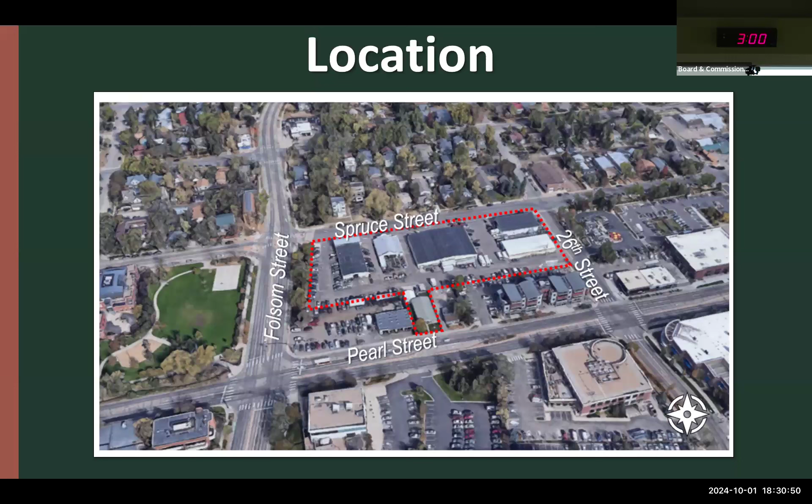So in terms of location, the site is located in central Boulder on Spruce Street between Folsom and 26th Streets, and includes a small adjoining lot on Pearl Street. The 2.33 acre site, or about 101,000 square feet and change, currently contains 5 one- and two-story light industrial, commercial, and retail buildings. It also contains a single-story, single-family residence with a detached garage at 2537 Pearl Street. This is just a shot of the existing buildings on the site.

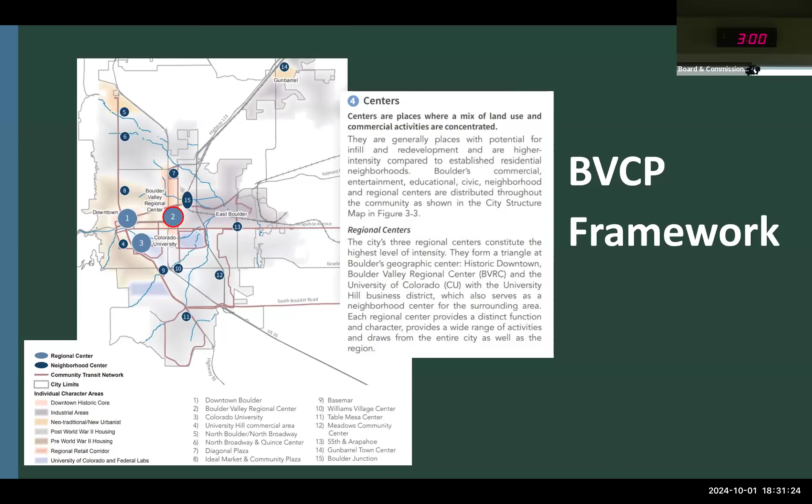For planning context, in terms of the comprehensive plan, the site is part of the Boulder Valley Regional Center, which is considered one of the city's 3 regional centers. Centers are defined as generally places with potential for infill and redevelopment and are higher intensity compared to established residential neighborhoods. As a regional center, the BVRC, along with downtown and university, is defined as having a wide range of activities. The BVRC is further defined as an area that should invite walking with a pedestrian orientation and a human scale. The site is located in the northwest corner of the BVRC, at the edge of the BVRC. And as such, it is subject to design guidelines, which were adopted in 1998.

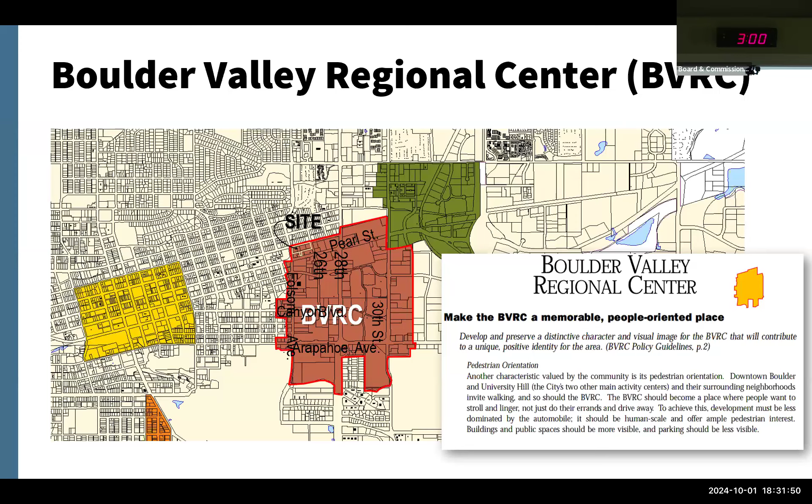Because of the site's location within the BVRC and near downtown, it is uniquely surrounded by a significant amount and variety of services from retail to office, recreation, and schools.

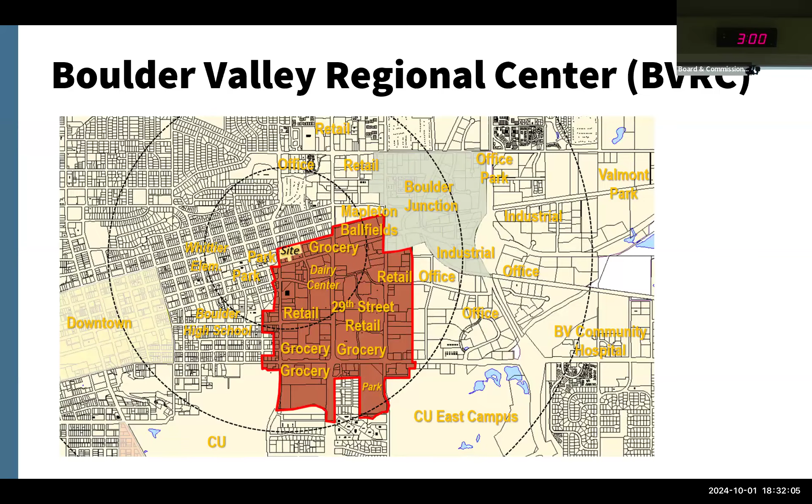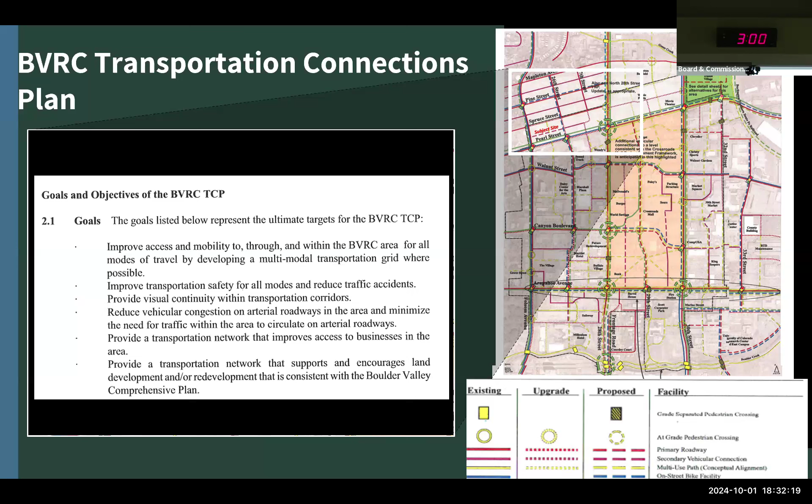Also, as part of the BVRC, there was a transportation connections plan adopted. The intent of the connections plan is to improve access and mobility through the BVRC by developing a multimodal grid, among other goals. For this site, the TCP illustrates a north-south multi-use path and an east-west secondary street on the south side of the site. These are the connections that are being requested to be removed, and we will get into that further down the road.

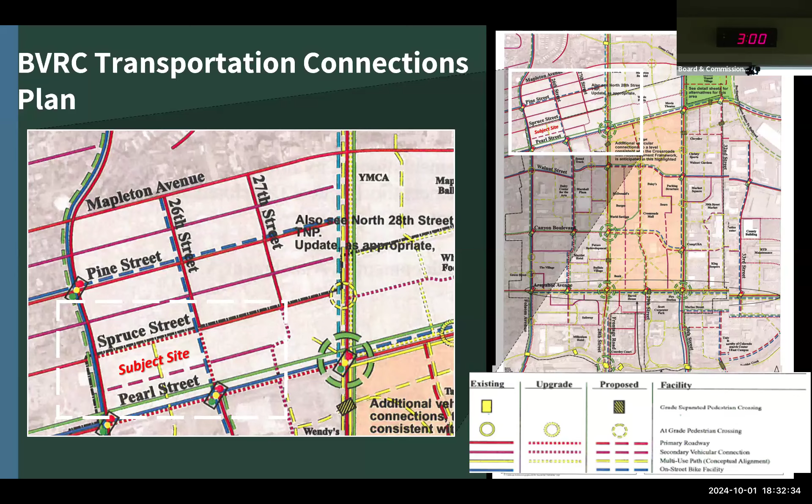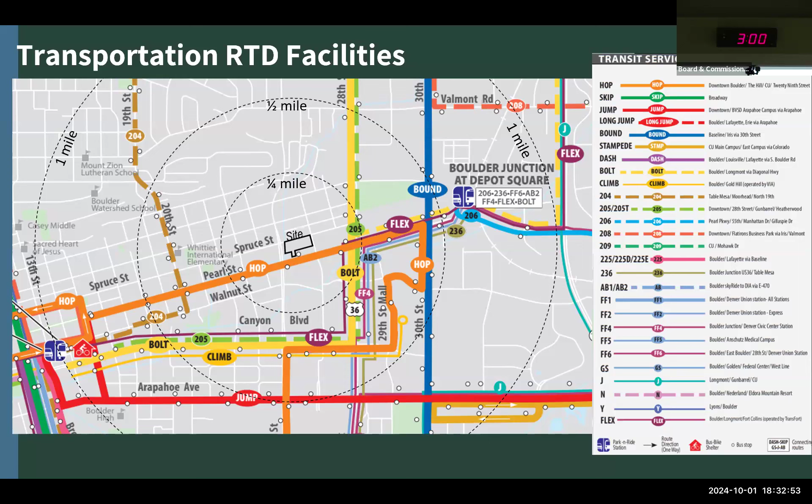Other aspects of the transportation context include the transit-rich area that the site is located within. As you'll note, within a quarter to a half mile, there are dozens of bus stops serving multiple local buses. And within a mile of the site, there is access to 2 regional bus facilities in downtown Boulder and Boulder Junction. The site is also highly walkable and bikeable, surrounded by on-street bike lanes within easy access to several multi-use paths.

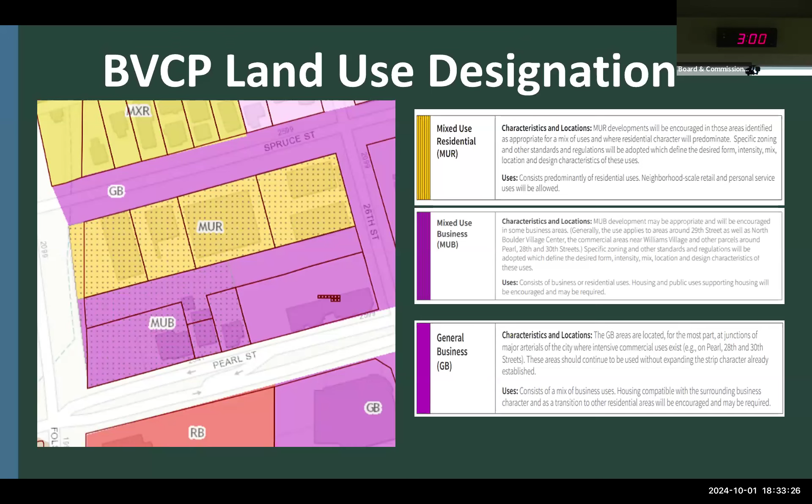So the site's comp plan land use designation is primarily mixed-use residential. This is defined as predominantly residential uses with neighborhood scale retail and personal service uses allowed. There are also a few smaller areas of the site that are zoned mixed-use business and general business. In terms of the zoning, the entire site is zoned BC2. This is defined as business areas containing retail centers serving a number of neighborhoods where retail type stores predominate.

Pursuant to the recently adopted Ordinance 8599, density and intensity in the BC2 is based on a maximum FAR of 1.5. Because the site is not located in an area subject to special use restrictions, attached residential is allowed by right. Form and bulk standards in BC2 typically require a 20-foot front yard setback, 15-foot side yard setback, 0 or 12-foot interior side yard setback, and a 20-foot rear yard setback. Buildings are limited to 3 stories and 35 feet.

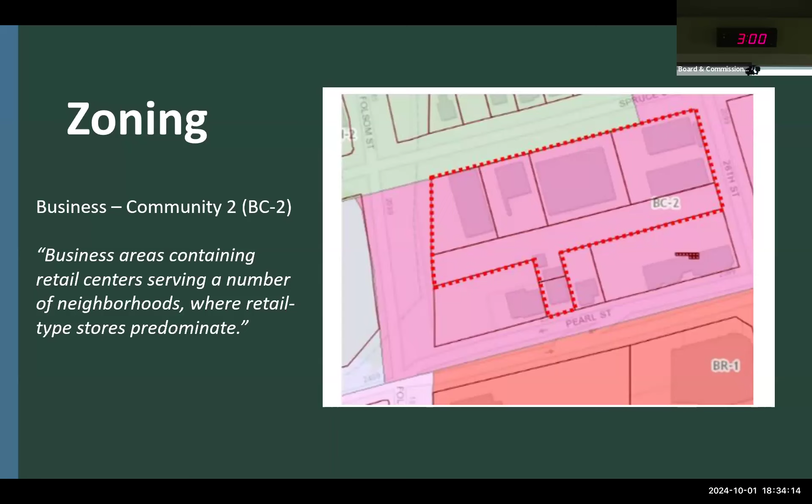The surrounding context has residential uses along Spruce Street and RH2, as well as retail uses to the east. There's a 4-story retail office building to the south, along with a marijuana dispensary. Across Folsom is Greenleaf Park, and the Boulder and White Rock Ditch parallels the site on the west.

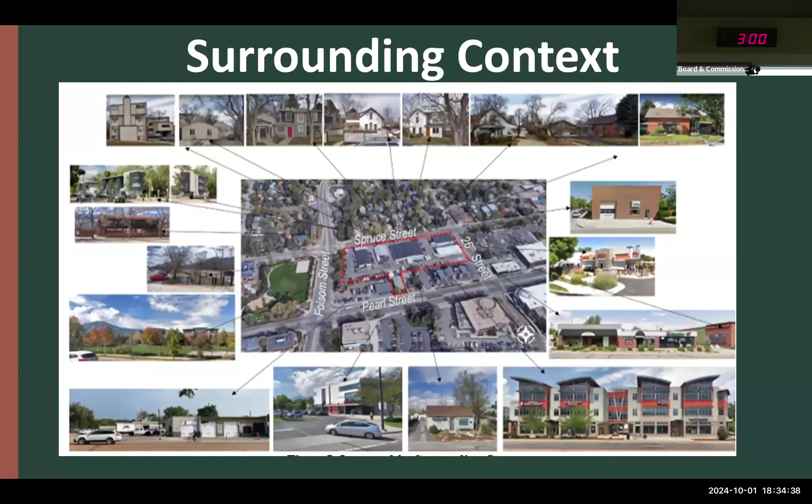Oh, did I already show this?

I think I did. The site itself consists of several warehouse, light industrial, and retail buildings with auto repair, scooter rental and repair, a furniture store, a thrift store. And at the northeast corner of the site is the Mecha building, which contains an existing gym use. The building was initially determined to be eligible for local landmark designation, but was ultimately not required to pursue landmark designation.

So in terms of the project background, just quickly, this project has had a lot of previous review, several previous public hearings. There was a concept plan submitted in September of 2021. That was brought before TAB in 2021. That went before Planning Board and then ultimately City Council, also in November of 2021. In November of 2022, the applicant submitted a second concept plan. That went to Planning Board as well. And then City Council called that up, and that was heard by City Council in January of 2023.

They submitted the site review in 2024, and in August of 2024, we brought the site review in front of the Transportation Advisory Board to ask for feedback on the requested amendment to the BVRC TCP. And then on September 6th, 2024, the project went before the Boulder Urban Renewal Authority, or BURA, also for the requested amendment to the transportation plan.

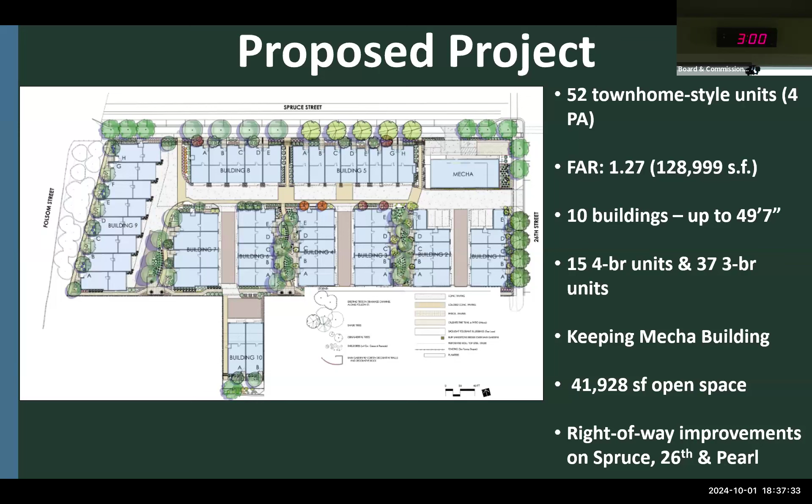This is just an aerial rendering of the site showing overall how the buildings are laid out. The proposed project is oriented to have 2 buildings facing Spruce Street, 1 building facing 26th Street, 1 building along Pearl Street, and 1 building facing Folsom Street. The additional 5 buildings are internal to the site with dedicated drive aisles that access private garages.

The roof decks are proposed to have interior stair access and a shade structure appurtenance that is topped with semi-transparent photovoltaic solar panels. The roof decks are intended to replace traditional backyards that would typically be seen in detached single-family homes, which in turn allows for a higher density design.

So in terms of the building massing and architecture, the primary materials in the project are brick, painted cementitious siding, and metal trim accents. There are defined ground level unit entries for all units. Along Spruce Street, the building has been stepped back at the 3rd story to reduce mass. And as explained in the memo and shown here, the reason for the height modification is to allow for the stairway access to the rooftop decks.

So there's not actually full enclosed stories above the 35-foot height limit. It's really just the parapet and the stairway access. So the result is that there's minimal 4th-story massing and staggered facades, staggered parapet heights, and varied roof angles, especially with the solar panels.

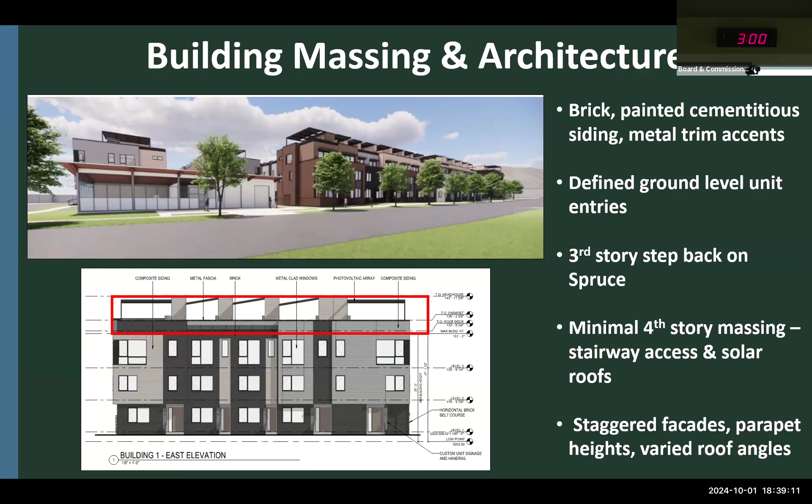These are just some additional renderings showing the general character of the architecture in the project, as well as how the massing is represented, and the solar panels with some variation in the angles of those panels and variation in the setbacks of the stairway access.

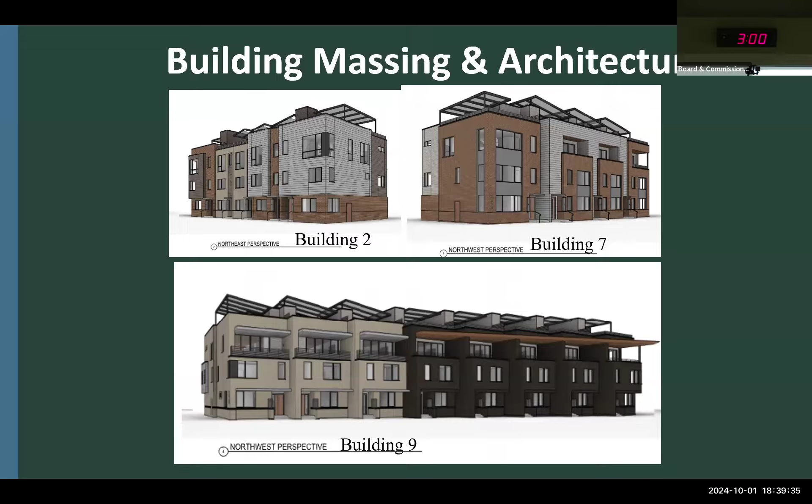In terms of access, parking, and circulation, the project proposes 1 vehicular access point off of 26th, which is shown there with the yellow arrow. There are 4 internal north-south pedestrian pathways, one of which is required to be public and located within a public access easement. And then there's an east-west trail that runs along the bottom of the site and kind of connects the 3 north-south pathways to Pearl.

As I mentioned before, there are 18 parallel spaces proposed on Spruce Street. The project provides space for rideshare pickup internal to the site. There are 88 private garage spaces and 9 surface spaces total. The surface spaces are proposed to be shared between the Mecha use and guests to the development.

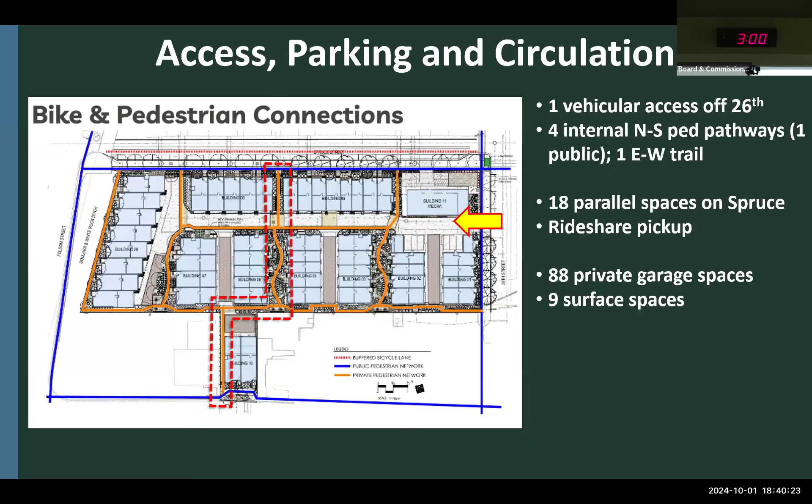So for the BVRC Transportation Connections Plan amendment, the current proposal does not include the north-south multi-use path connection or the east-west secondary street connection that are shown in the Transportation Connections Plan. Plan amendments represent modifications to the TCP document or modifications to the map-based component of the plan that propose a change in connectivity. These require review and recommendation by the Transportation Advisory Board, or TAB, and Boulder Urban Renewal Authority, or BURA, and a decision by the Planning Board subject to City Council call-up.

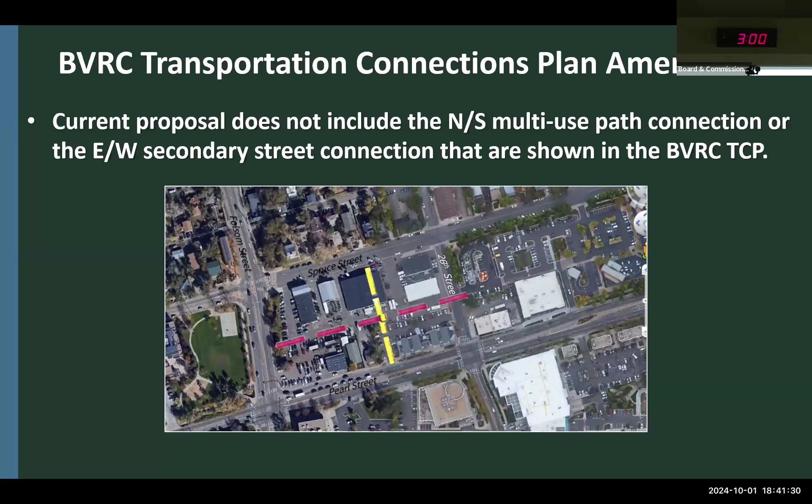So as I mentioned before, this project has gone before TAB twice. The first time in October of 2021, at which TAB recommended removal of the east-west secondary street connection. It was then realized that they didn't ask for the north-south multi-use path at that hearing, so we went back in August of 2024, wherein TAB recommended removal of the north-south multi-use path connection under the condition that a public access easement, a minimum of 5 feet in width, be dedicated along essentially the path of the central north-south pedestrian pathway.

After receiving TAB recommendations on those 2 connections, we brought the project to BURA. That occurred on September 26th, 2024. BURA reviewed the project and recommended removal of both connections from the BVRC TCP, subject to the recommendations made by TAB, and directed staff to convey that opinion to the Planning Board.

So the key issues for discussion, there are 3 key issues, which is whether the project is consistent with the site review criteria, including the additional criteria for height modifications, whether the vehicular parking reduction is consistent with the parking reduction criteria, and is the proposed amendment to the Boulder BVRC TCP consistent with the applicable criteria for amendments to that plan.

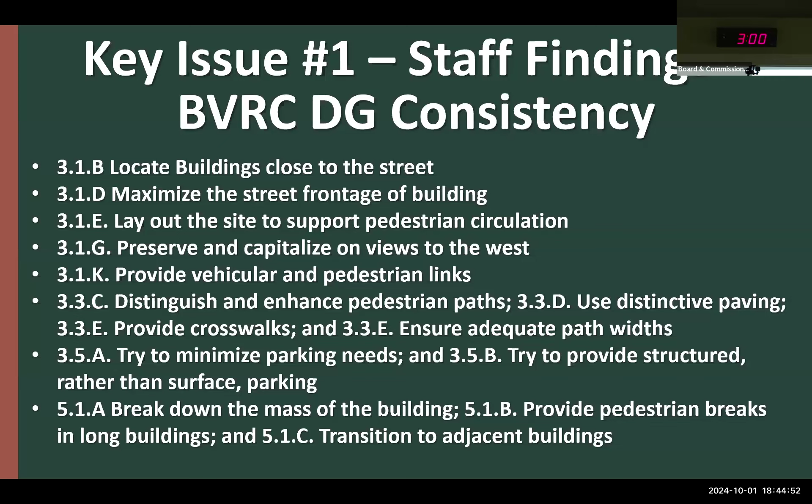In terms of the additional criteria for height modifications, there are no buildings that are greater than 200 feet in length along any public right-of-way. There are 2 buildings that are over 120 feet in length, which are buildings 5 and 9. Each of these buildings we found have been successfully designed to appear as 2 distinct buildings by varying material, color, and massing. The project is located near a multimodal corridor with transit service and near an area of redevelopment where a higher intensity of use and similar building heights are anticipated, basically south and southeast in the BVRC. The project is designed to a human scale and to create visual permeability into and through the site, and it meets the intent of the open space requirements.

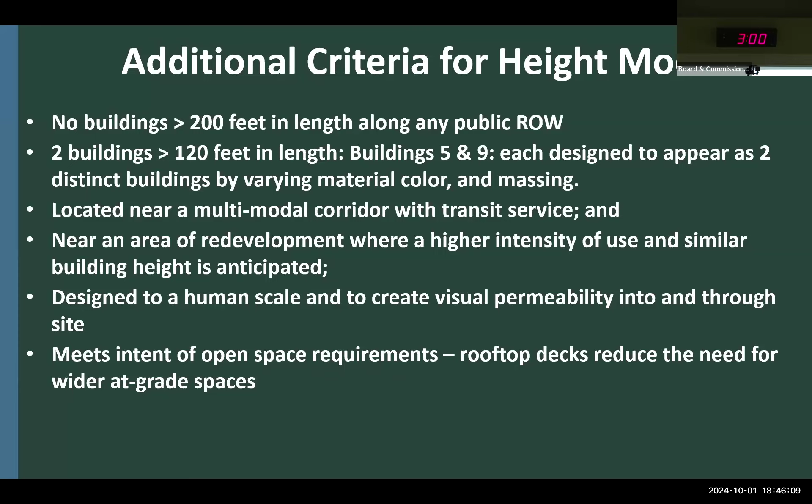The one consideration in the site review criteria that the project does not meet is to have an at-grade open space that is at least as wide as the buildings are tall. And this is something we discussed with the applicant extensively, and staff really found that based on the design of the open space within the project, as well as the rooftop decks for all of the units, the need for such a wide at-grade space is reduced. So we still felt that the project meets the overall intent of the open space requirements for buildings requiring a height modification.

Key issue number 2, which is whether the proposed vehicular parking reduction is consistent with the parking reduction criteria, as well as the applicable site review criteria. As noted, the project is requesting a 25% parking reduction to allow for 97 parking spaces to be provided where 129 are required. The first criterion here is the probable number of all motor vehicles to be owned by occupants of and visitors to dwelling units in the project will be adequately accommodated through robust TDM measures.

They are providing neighborhood eco passes for residents for a minimum of 3 years. Each unit does have a minimum of 1 garage space. There's a scooter station provided on site. There's bicycle parking. Long-term is provided in the garages and within the units, but additionally 8 short-term and 2 long-term spaces are provided for Mecca. As previously mentioned, the project is located near several major transit lines and is within walking distance of many nearby services and businesses. And there is nearby on-street parking for visitors as well.

In terms of availability of off-street and nearby on-street parking, there's on-street parking available on Spruce and Pine, as well as multiple nearby north-south streets. There are 18 new parallel spaces provided directly adjacent to the site on Spruce Street. And use of multimodal transportation options will continue to reduce the need for on-site parking on an ongoing basis. And this is largely achieved through the TDM measures, as well as just the site location and characteristics.

Good evening, all. Ali Gilvar, Pace Development. Good to be back yet again. But anyway, I'm going to be very brief. I'm going to give you a little bit of history from when I saw you last, and the major development is that I became partners with Trailbreak Partners from Denver to get this project done. And they joined me last May. So we've been working together to come up with this scheme.

In this latest iteration, since the apartment building became not possible to pursue because of zoning issues, we have gone back to the board and have come up with a scheme that we think is great for the site. It's really about families. It's about units that will serve families. And we have the park across the street, and my fellow consultants will go through this in greater detail when it's their turn. But central to all that we have been working on for the past 3.5 years is to create an environment where a variety of persons of different incomes can live together. And that is why we have the affordable units on site here.

And just so you know, and Dave will get into this in greater detail, those are extremely expensive for us to do. And we don't intend to give them up. Okay? So having said that, Dave Bacon is Development Director with Trailbreak. He's going to go next. Danica Powell will be after him. And then Pete Weber with Coburn Architecture will follow them.

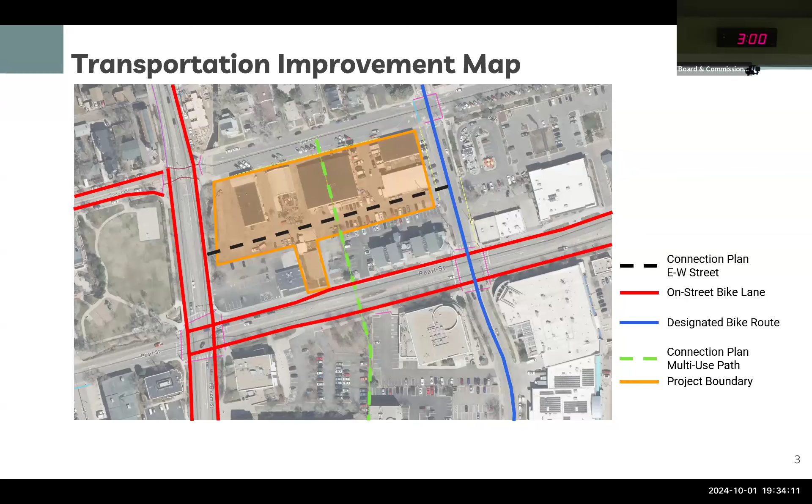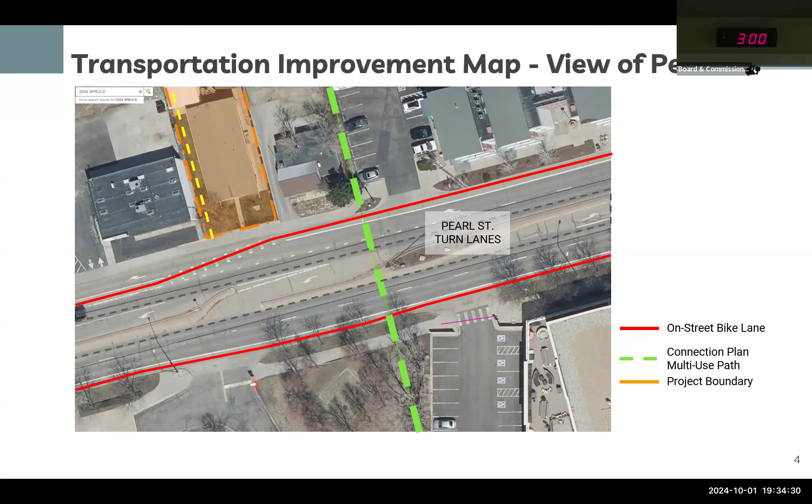And the other connections are the ones that are on the plans that are already in place or that we are improving. Just a close-up of that north-south as we really dug deep into how to provide that across Pearl. It became very apparent that it would be a very unsafe connection to travel through what is a median and a turn lane there, and it really doesn't connect to anything. And the east-west also hits a similar dead end as you hit the ditch on the west side of the property.

Chandler also showed that this was a really great centrally located site where we're very walkable within close proximity to transit services, shopping, etc. Mecca, which is one of those personal services, is planning to stay on site and hopefully purchase that building to remain there forever. And with that, I will pass it on to Pete to take us through the rest of the presentation.

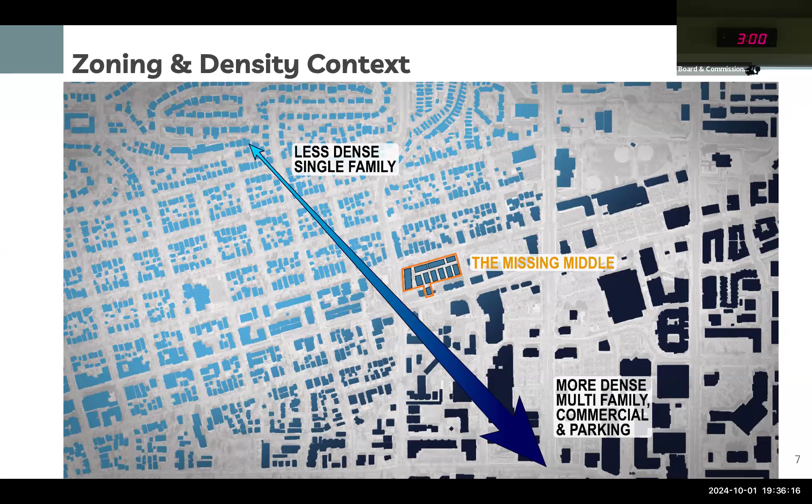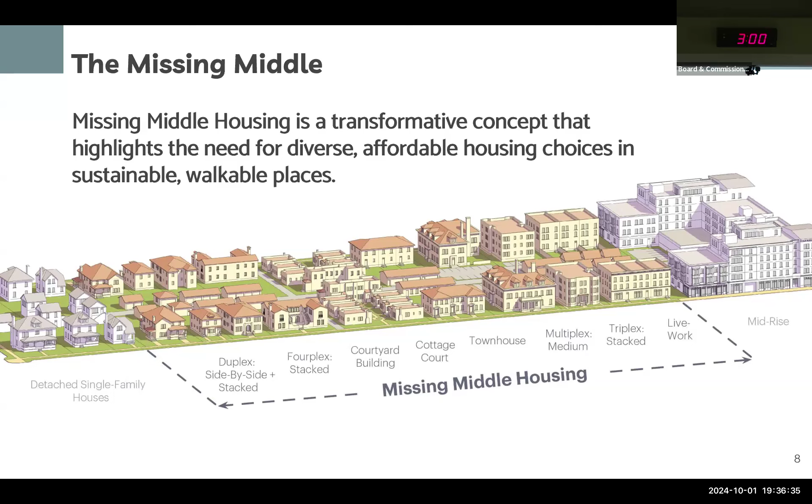The other thing that's great about this site is that it is located in between the single-family neighborhoods to the north and to the west and the multifamily and commercial zone to the east. And the townhome opportunity that you're going to look at today offers an opportunity to help address the missing middle in terms of housing types. The missing middle is something that barely exists in Boulder. If you're from the east or the Midwest, these types of housing units exist in quantity, but they just don't in Boulder. So we're offering a type of housing that really barely exists in the city of Boulder. In particular, we're talking about townhomes.

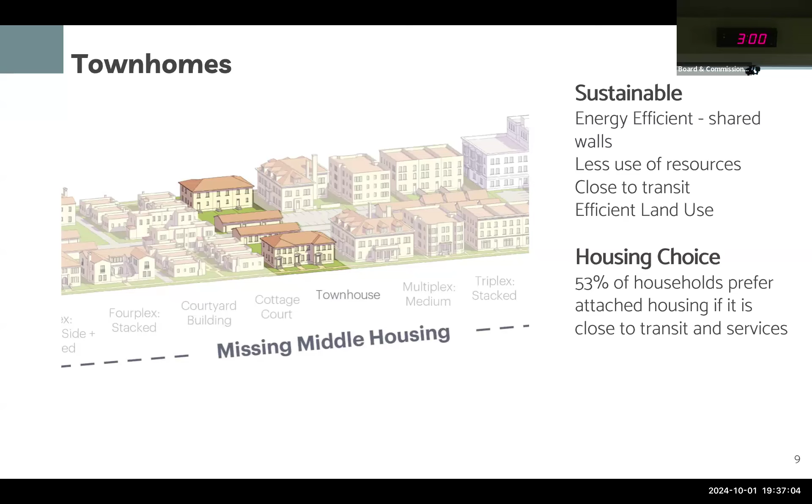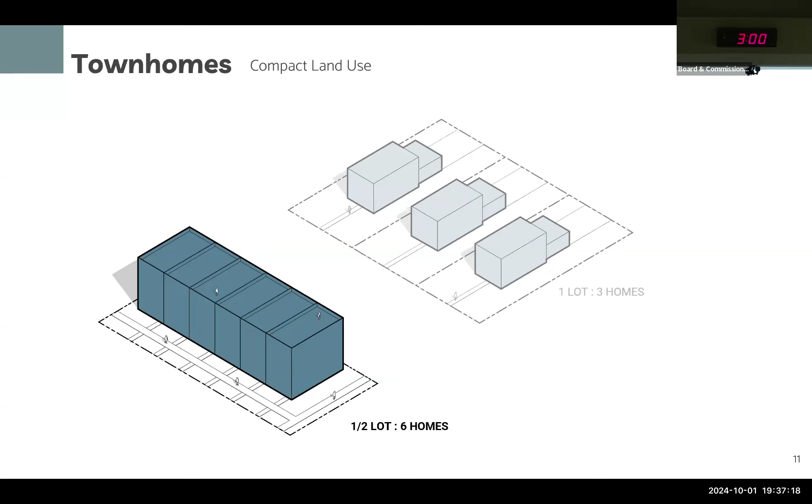Townhomes provide energy efficiency in that they have shared walls. The long walls of the units are actually shared, so we're not heating as much of the exterior of the building. Less resource use. Those walls now don't have exterior materials on them. As adequately pointed out, we are extremely close to transit here, and the townhomes are a very efficient use of land. And here's how that works. We take what would be single-family home lots, we stack them, and we put them together. And what we're able to do is basically get twice the number of units on half the land. So very compact and efficient land use.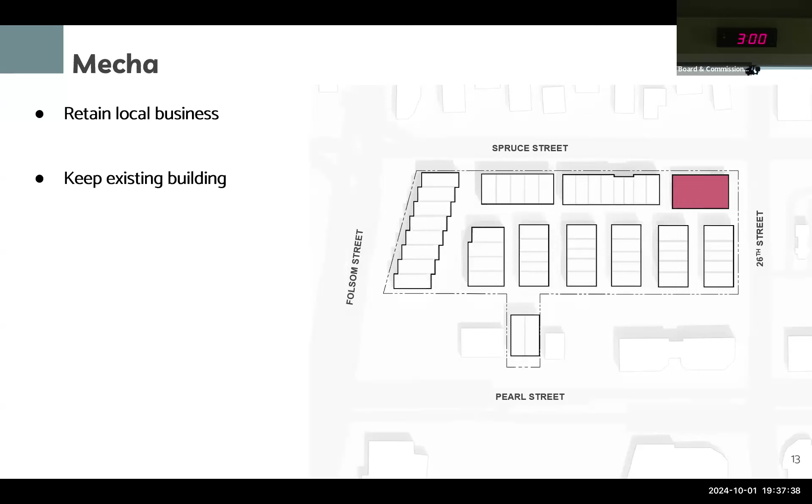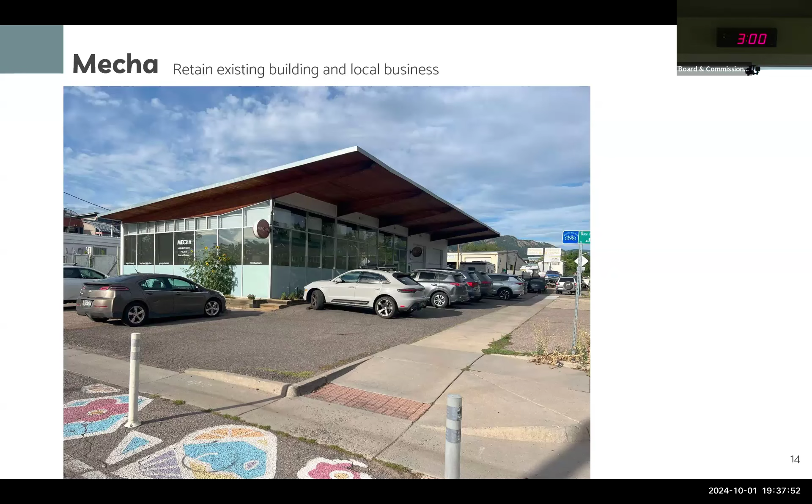And here's how we come up with the site plan that we have. The first thing we did was to decide to keep the Mecha building after all the other ramifications, and we'll go into that in Q&A if you like. But the ultimate decision was to keep that building, retain that local business, and keep the building on site, and that anchors the northeast corner of the site. And it's a cool building. It's just a nice little example of kind of 1960s car-oriented buildings. And here's what it looks like in the context of the project. The building's largely going to stay the same. We have to move a piece of mechanical equipment, but otherwise the building will stay as is.

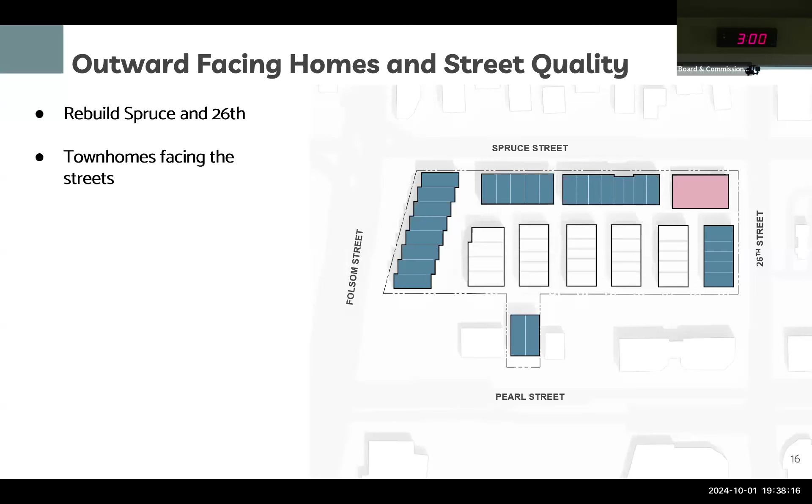Next thing we did was remake the streets. All of our townhomes on the perimeter face outward, so they're facing the streets, 26th Street, Spruce, Folsom, and Pearl. And we're going to fix the streets. Spruce and 26th Street in particular are a bit of a mess, far from being complete streets. There is no sidewalk. There's no bike lane. It's actually quite dangerous on a bike coming down Spruce here. I do it all the time. And the combination of diagonal and parallel parking and curb cuts makes it very confusing and difficult to navigate. You really got to get your bike out there in the travel lane to have any sense of safety. There's no tree lawn. The visibility is horrible.

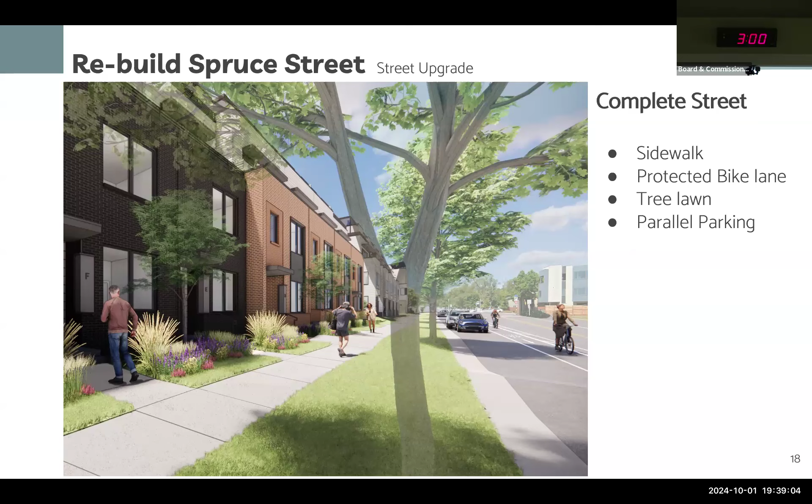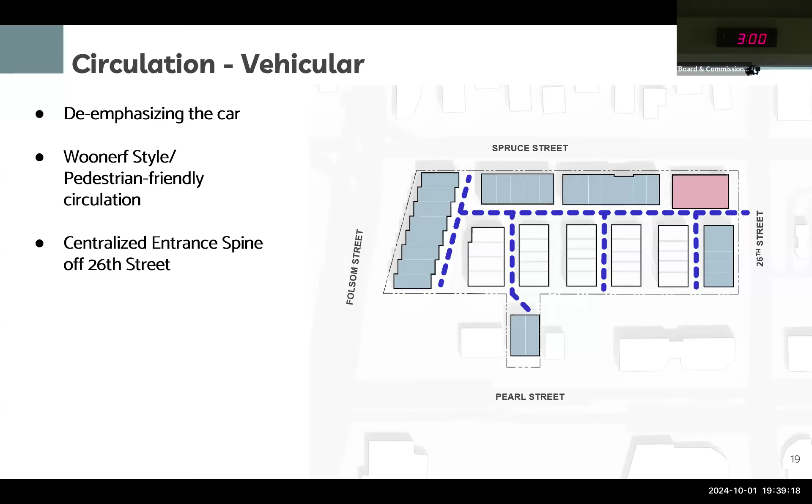The vehicular circulation on the site: all the cars will come off of 26th Street, so just one curb cut at 26th Street, and then circulate internally to the individual garages. And here's how that works. We have a combination of large and small garages, 1 and 2 car, if you will. Those are all a little bit oversized, so there's room in there for your other stuff, bikes, trash. Whether you're a 1 car or a 2 car, there's a little bit of extra.

And then we have surface parking for the Mecha building in 2 locations, one in front on Spruce Street and then one behind. And one note about some of the letters that you got: they indicated, I think, a 39% parking reduction. It's actually a 25% parking reduction, just to be clear. I think there was some confusion about various iterations of the plan while we were in the staff process.

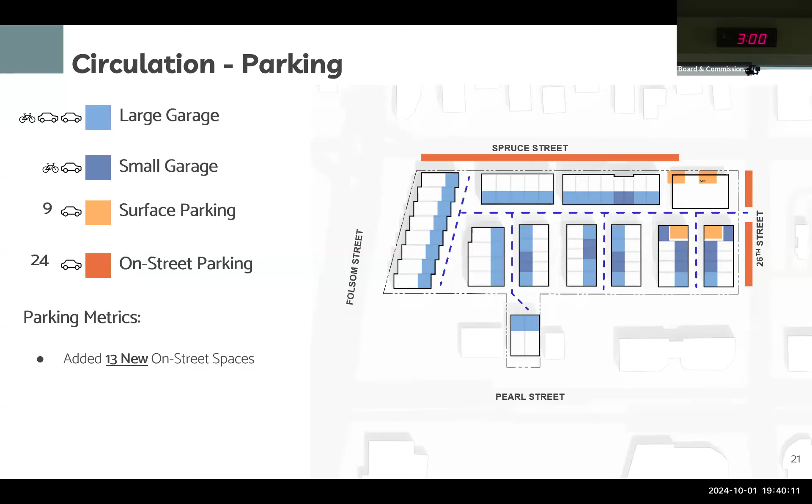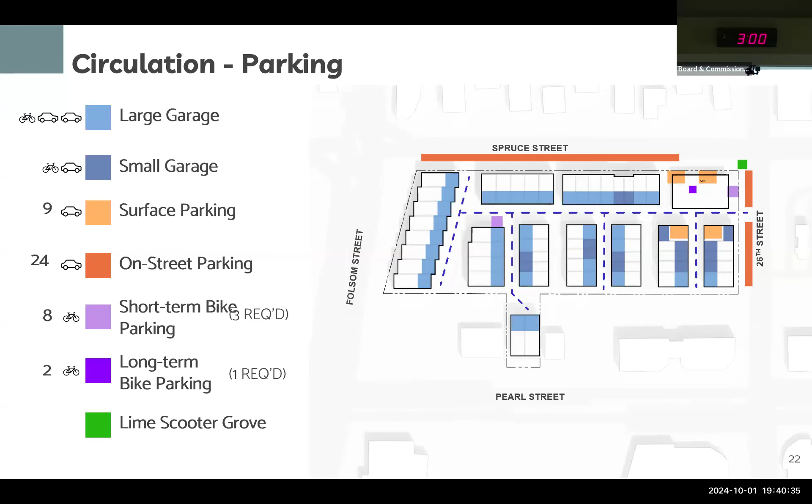And then in addition to the garages, we've actually added a significant amount of on-street parking, adding 13 total new on-street parking spaces in parallel along Spruce and along 26th Street. And then we also have a significant amount of bike parking for all of the individual townhomes that they've got space in their garages, and then some short-term and long-term bike parking in multiple locations on the site, and a Lime scooter grove at the corner of 26th and Spruce.

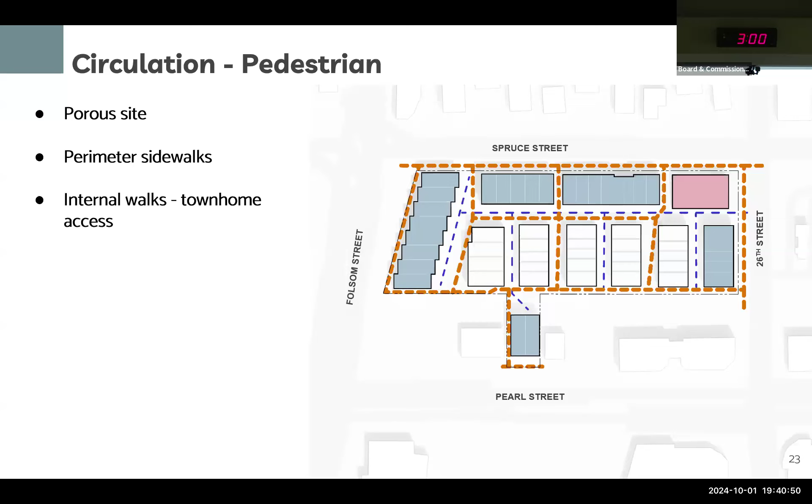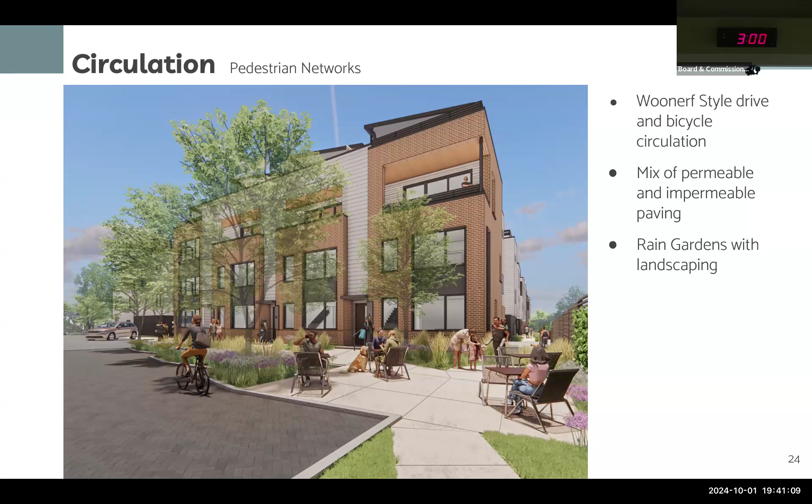The pedestrian circulation is around the perimeter. So we fixed these sidewalks, and then we have a series of pedestrian paths internal to the site that connect all the various aspects to the public way. And here's what some of those look like. This is looking down the path that runs on the south side of the site. These walkways are a mix of various paving patterns, and they are accompanied by rain gardens all along the way.

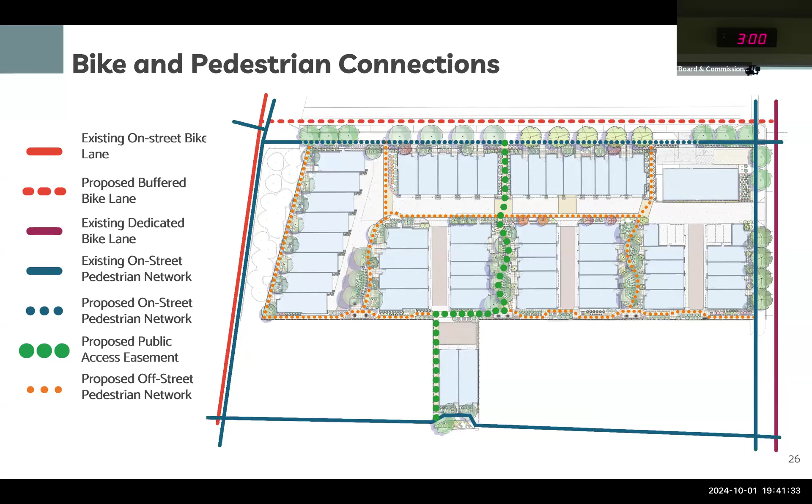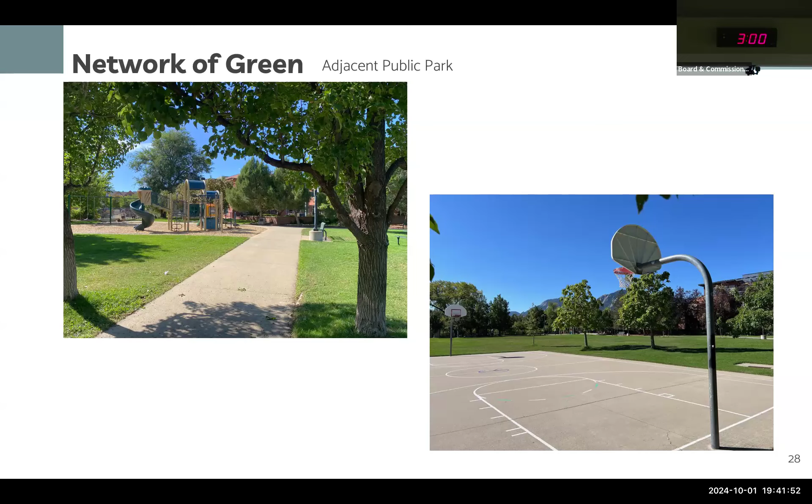Next, we looked at a network of green. We start with Greenleaf Park, which is immediately across the street. This is a great little park if you haven't spent any time there. There's a playground for kids. There's a basketball court for older folks. And then this ample green open space immediately across Folsom.

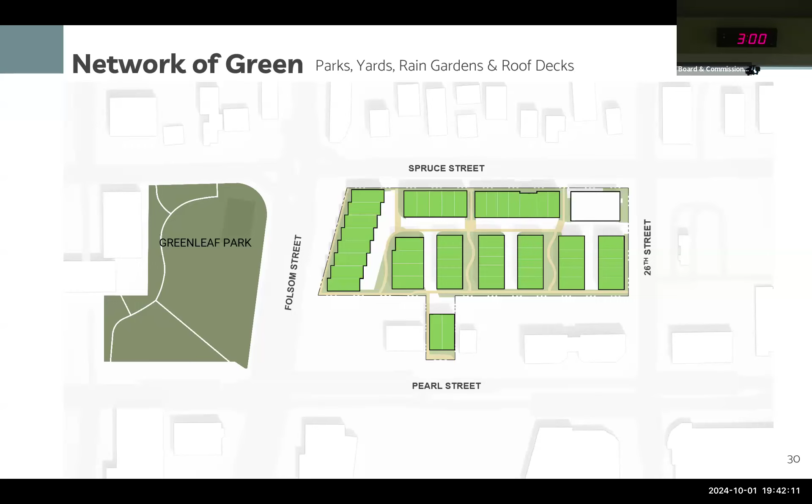Next, we took a look at internal green space, so the space between the buildings and around the buildings. Again, those are a combination of rain gardens and pathways. And then the last thing is to consider open space at the roof level. And here's what we're doing there. We're taking what you would normally see in a single family condition, and we're dividing that up in different ways across the site. There's in front of the units, between the units. Those are accompanied by rain gardens. Then we run pathways through those gardens. And then finally, we take the yards and put them at the roof level.

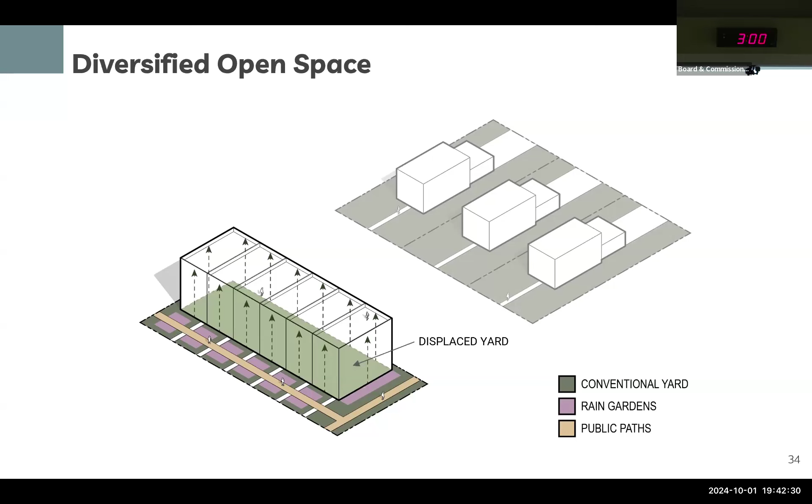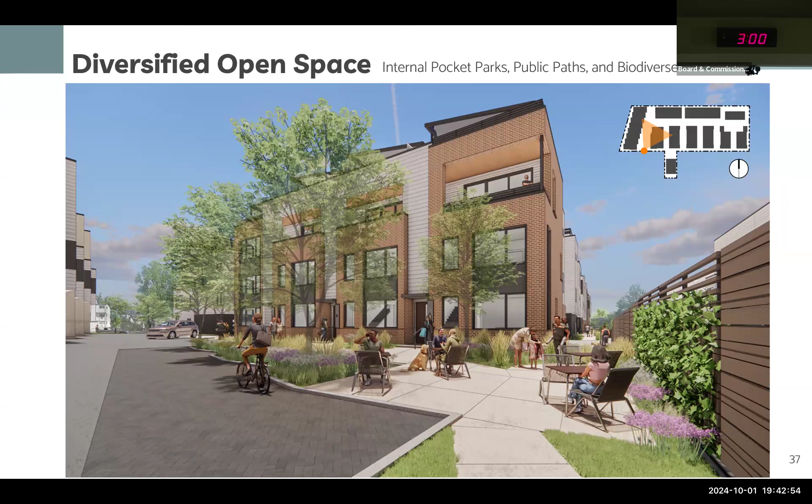And here's those open spaces again. This is where the public access easement is with the rain gardens. This is where the entries are to all those internal units off of those green spaces. And then that one that's in the southwest corner, again, this is the largest of the gathering spaces, and I can give you some dimensional aspects to this if you like when we get to that in the Q&A.

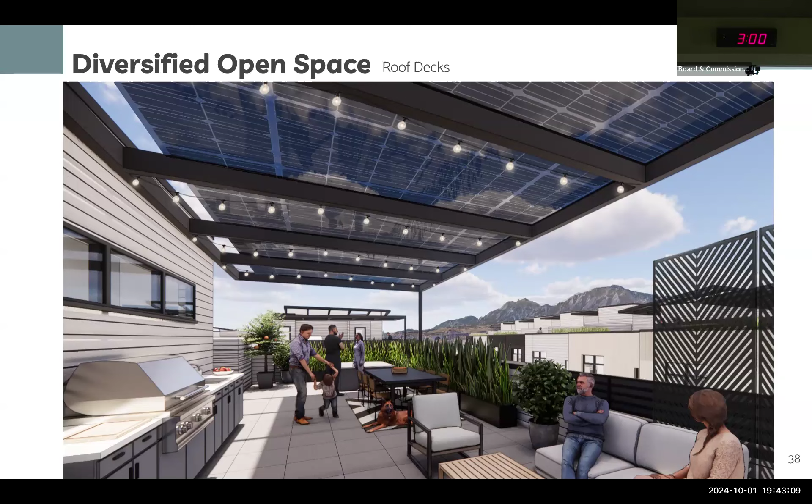And then the roof decks. Each unit has its own roof deck. They are all covered with solar panels that are translucent, so you get some of the light through, but enough shade to allow you to get out there in the middle of the summer.

And here's how that fits on the site. There's 182 total bedrooms, 11 buildings, 52 townhomes, including 4 affordable, which are, I want to emphasize this, for sale. For sale affordable is something that we rarely see. It's very difficult to do. It's expensive, but the project can provide it.

And this site is very sustainable. I mean, the location is probably the most important piece, which we've probably said enough about for now. There's the solar on the rooftop, the permeable pavers and rain gardens, which take care of our water quality for the site. This site currently is virtually entirely paved. So all the green that you see is new. There might be one tree coming up through the cracks in the pavement, but otherwise the site is currently paved. And then we're keeping the Mecca building on the corner, and all of the residential will be all electric.

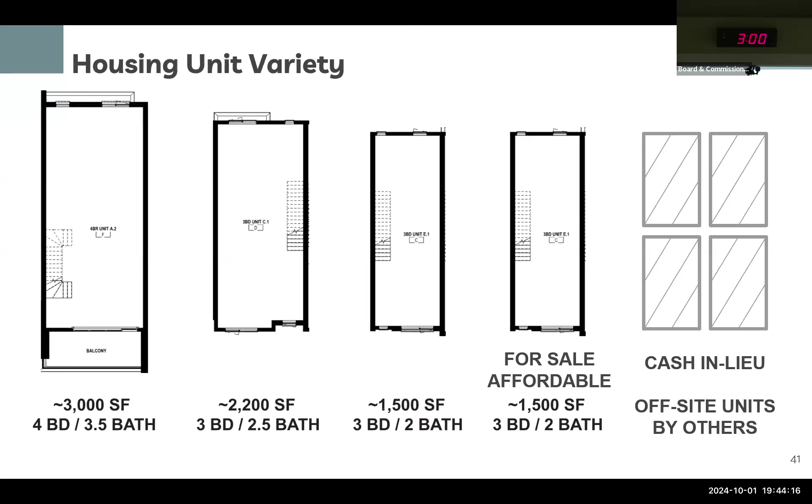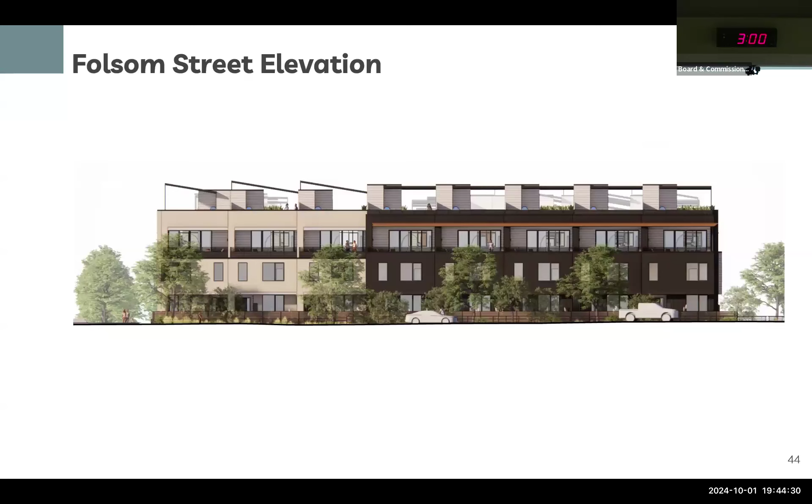A little bit about the units. We have a variety of units. Okay, sure. So size ranges, as you can see here, including the on-site affordable. The architecture is a mix of brick and other materials. This is the townhomes on Spruce. We tried to break this up. Again, there's 11 buildings, multiple architectural moves to try to keep it varied. Here's the buildings along Folsom. And then these, I'll try to move quickly.

One thing I want to point out about this one is that we have purposely set back the upper levels so that from the street you really have a 2-story component that you're experiencing from the sidewalk. And then again, the courtyards in the center of the site. And then you haven't seen this one yet. This is looking at the corner of Folsom and Spruce across the ditch towards the townhomes there.

Thank you. Happy to answer any questions. Got a bunch of folks here that can help. Thank you very much. You concluded that with 5 seconds remaining, so we're right on. Okay. Thank you to the applicant. Okay, we'll go to questions from the board. Who would like to start? I see Claudia moving her microphone.

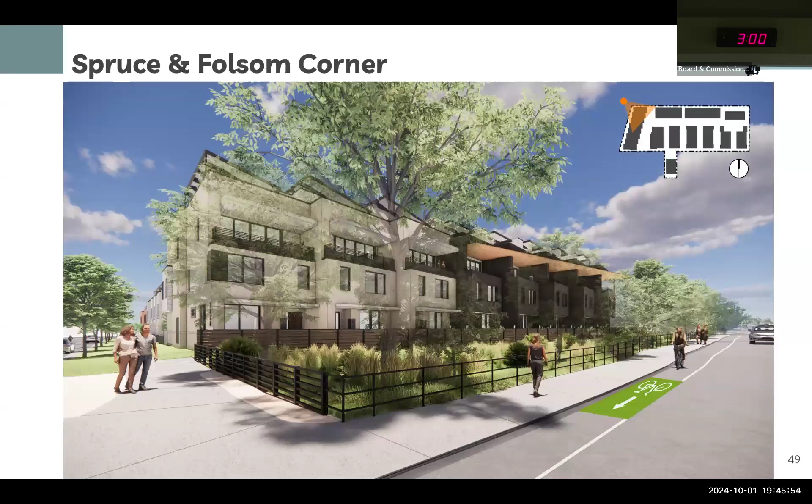I'll try to keep these ones a little more short and specific. I have some questions about the site design, in particular the open spaces, shared spaces, et cetera. I think I asked one of them in the staff presentation and was hoping to get an answer on the size of the interior open space corridors. Like, what is the width that you're talking about there? And then the size of that open space on the southwest.

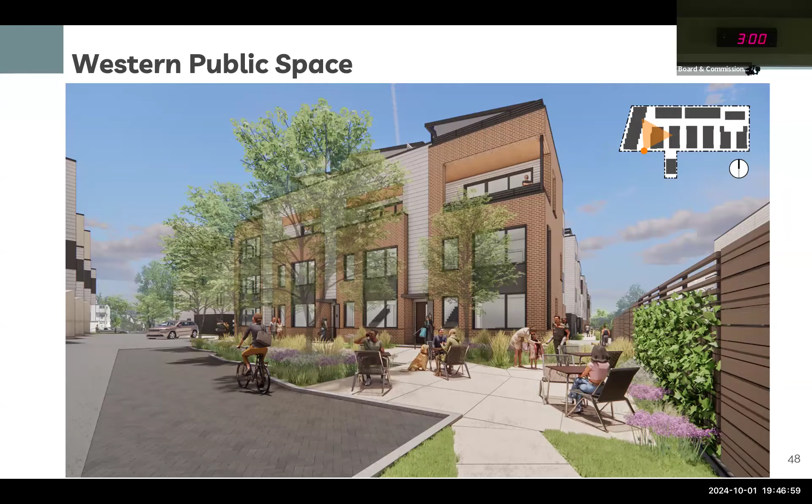So where your internal paths cross the access drive, is there any differentiation there planned in terms of paving, in terms of elevation and grade? The grade does not change. I'm trying to get back to the site plan for you. Yeah, that's it. Thank you. Yeah, so you can see how the paving does change with the paths. So we've got pavers that follow along with the path so that the pedestrian is clearly delineated and the cars are slowed by that differentiation.

Okay. One more connections question. Is there any pedestrian connection between the internal walks there on the west side of the property and the actual city sidewalk on Folsom? No, there's not. Not until you get to the corner of Spruce and Folsom. The ditch is there, and we don't have the ability to cross that ditch. There is a sidewalk on our side of the ditch that we're putting in that runs parallel to the city sidewalk on the other side of the ditch. Okay, but will it connect to either Pearl or to Spruce on the north or the south, that internal sidewalk? It does connect to the sidewalk on Spruce, and via the southern sidewalk, it would come over to Pearl and down.

Okay. And then one more question. The little stub of land that you have to the south, where you have a bit of a T connection there to Pearl Street, do the units that you've put down there have any entryway on the interior of the site? I know there's some requirements that you actually have building frontage on Pearl Street, but how do those buildings interface with the majority of the site to the north? Yeah, so the walkway does come past that building and down. Their vehicular entrance is to the north, but their pedestrian entrance is off of Pearl Street.

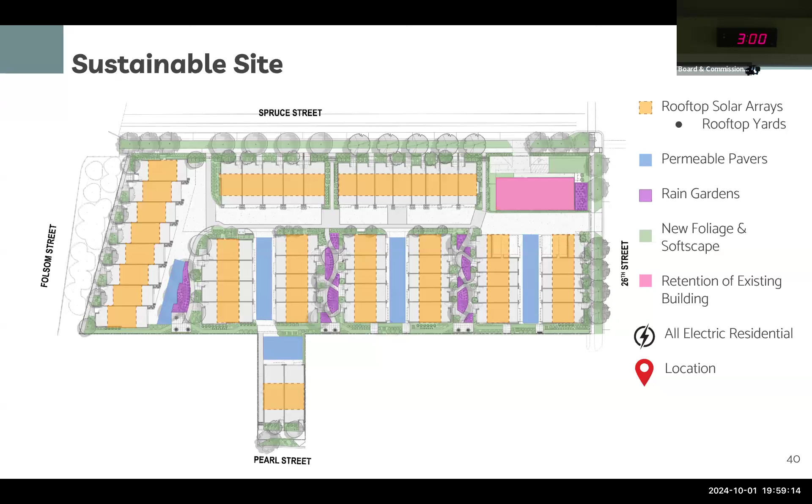Will some of the corners, just based on the drawing, and again, a little yellow line on a page is not a set of construction documents, but it looks like some of those corners are greater than 90 degrees as the path kind of winds, and then it makes what would be a 90-degree corner if it was just a straight path. Some of those corners are greater than 90 degrees.

Do you plan on easing the radii in those corners? I'm concerned about accessibility for people in wheelchairs or whatever other wheeled mobility, and cyclists. And I realize you don't want cyclists speeding through here, but older cyclists, younger cyclists, kids, etc. And people tend to cut things off that are 90 or greater than 90. So do you plan on easing those radii and making that a softer radius at all those 90-degree corners? Because you do have several through there.

Yeah, there's a couple interior corners there that I think we should take all that into account. I think your points are well made. Okay. All right. I'll end on that. And my next questions are in regard to your choice for horizontal cement siding in some relatively large, to me, large areas. What went into your design choice on that? Was it mainly cost? Are there other design considerations?

Because I've been exposed recently to large swaths of horizontal cement siding. And if done with the slightest defect, the eye picks up on that and it looks really cheap. But I could be dissuaded of having that opinion if newer siding products are superior to old warpy ones, et cetera. So can you comment on your choice for that cement siding in those large panels of more of the interior space? You use brick on a lot of the exterior sidewalk facing ones, but the interior faces seem like they have a lot of that. Yeah, there's a fair amount of that.

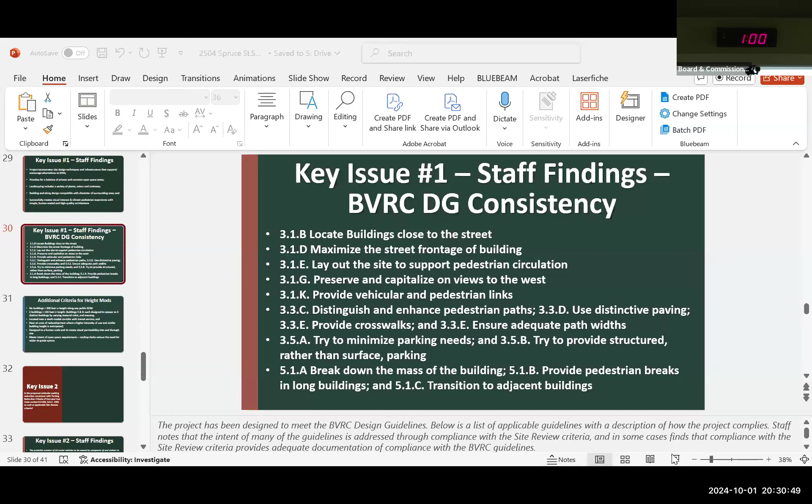Okay. Yeah, that's one of those Zoom things. I don't think you can move that black box, but

okay. And so again, we're moving on with the site review criteria. Okay. So I would propose that, if someone's ready, we go ahead with what we've been doing in recent meetings, which is to just begin with whoever's ready and answer all 3 questions rather than cycling through everyone on each question individually. If that's okay with my fellow board members, we'll begin. And is anyone ready with their thoughts on the key issues for discussion?